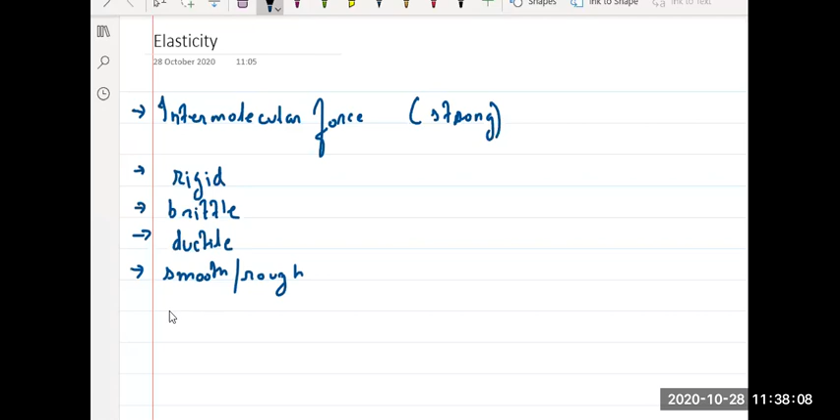Now melting point and all those things will come into intermolecular forces only, right? So we won't be going into the chemistry or thermodynamics part. We just talk about the physical nature. So mostly we'll be talking about these things.

There's one more property. Tell me, I'm waiting. What was the name of the topic? Tell me, what is the name of the topic? Yes, elasticity. So I can say elasticity, right? Okay, or plasticity.

Now, we will start with the basic introduction of this chapter. What is the meaning of elastic substance? Think about it. If I have to ask - because we all know the term elastic since our childhood - but when I ask you, what is the actual meaning of elastic substance? Tell me from your observation, just tell me what is the meaning of elastic substance.

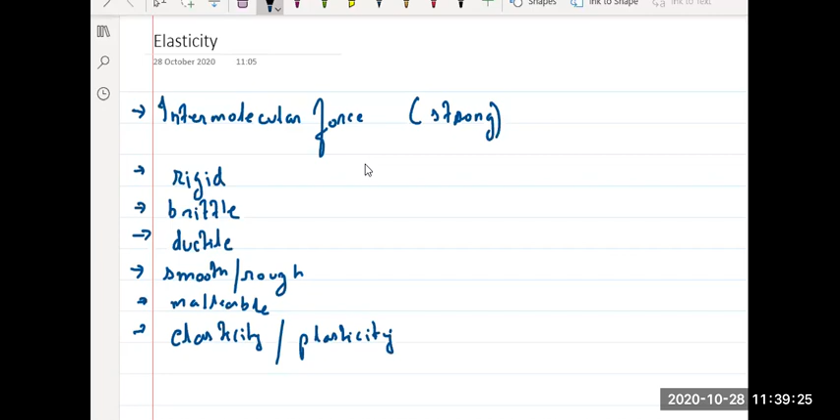Yes, very good. So I can say that the basic meaning of elastic substance is: any substance which regains its shape. For example, when you talk about rubber - rubber will regain its shape when you stretch it, then after some time it will regain its shape. So I can say that rubbers are elastic, right?

Yes, very good. Spring - very good, right? So springs are also elastic. Anything else? Sponge, okay, very good, right. So rubber band is rubber only, right? So these are elastic. What about your chalk?

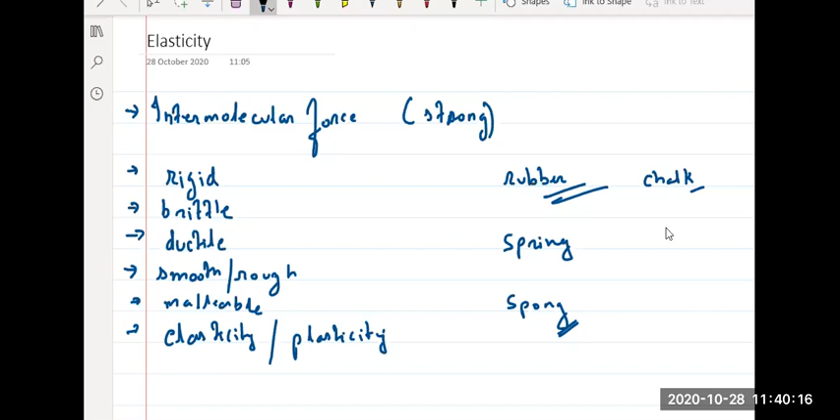What about your pen? Okay, what about steel? Steel - elastic or non-elastic? Okay, steel, not steam, Samarth, it's steel, right? Iron, steel.

Now, the thing is, for now we have this perception that a substance which can completely regain its shape is an elastic substance, but that's not true. I can say that the extent of elastic nature may vary from one substance to another. It might happen that some substance which we think is non-elastic may have some elastic property up to some extent. So we will be discussing what is the reason for this elastic behavior, what are the factors, and how to calculate it.

Now, for this - steel is elastic, steel is highly elastic, okay. We'll just discuss how.

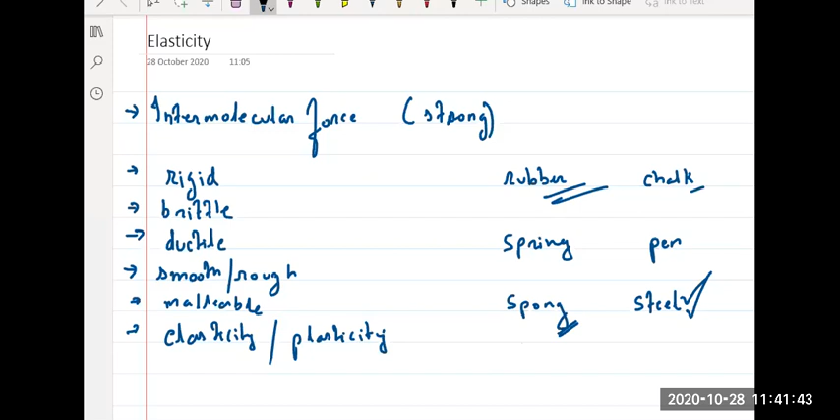Now let's see what is the meaning of these things. First of all, when we talk about a substance, we talk about its strength - strength of the substance, how strong any substance is, right everyone? So when we talk about the strength of a substance, strength of a material, what are the factors that we consider? Think about it. For example, you say this material is strong, this material is weak - what are the factors we consider for that? Okay, yes, hardness, okay. Anything else?

Okay, hardness, softness, rigidity. So have you heard of the word stress and strain? Ductility, okay, yes, very good, Srihari. So you can also say that, how much force it can experience before breaking, right?

Or how much force it can sustain before deforming or before fracture, right everyone? Now what's the meaning of these terms? What is the meaning of stress? Because when we talk about strength, we talk about a term called stress. Now before talking about stress, just think about a more basic thing.

What happens when we try to deform anything? Think about it. Suppose when you try to stretch a rubber, or when you try to push a sponge, what basically happens? Think about it.

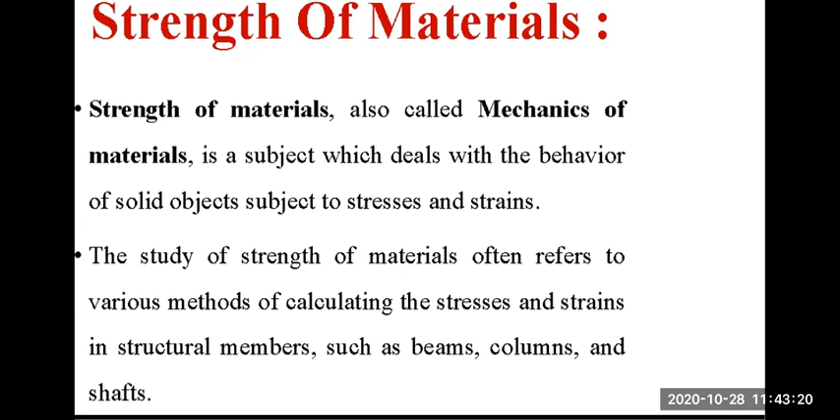We apply force, okay, very good. So when we talk about this, let's talk about a rubber which is like of this length, suppose, okay, just like this.

Now suppose you apply a force, it is a rubber. You apply a force in this direction. It is your applied force, or it is your driving force. Now tell me what will happen here. Think about it.

Just from your observation, what will happen if you try to pull a rubber? If you try to apply a force, what will happen? Obviously you're pulling from both sides. Yes, so the rubber will try to expand, it will try to stretch. So from this, it will try to stretch like this. Agree?

Got it? Now, if you apply more force, then what will happen? Think about it. It will stretch more first, right? Breaking is again the extreme point. You try to stretch more, yes or no? It will stretch more. I can say that if you apply more force, it will stretch more, as simple as that.

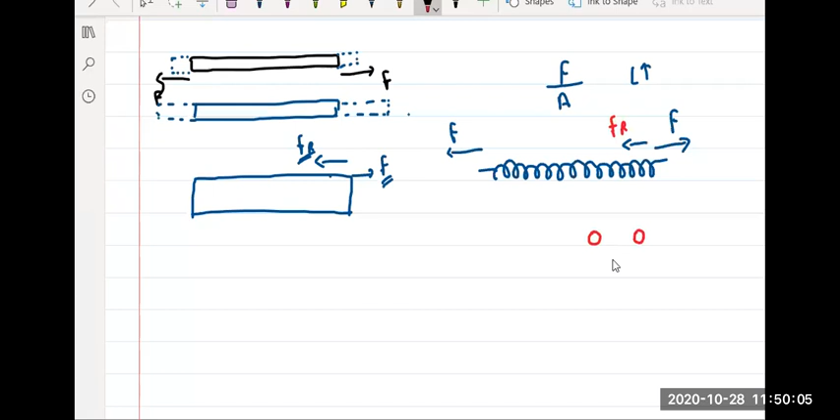Now if we talk about the intermolecular level, what happens? Think about it. We know that when you talk about two atoms, they are normally stable under some fixed distance, which is your internuclear distance, right, if you talk about on the interatomic level.

Now we know that this is the stable distance for any two atoms. If we try to pull it away, it will try to again come closer for the stability because of the force of attraction, intermolecular force of attraction. So I can say that that might be one of the reasons for this restoring force. I hope all have understood this.

So if we talk about this force per unit area, if this force is the force applied by us, which is your driving force, then this term will become pressure. Because that's the basic definition of pressure.

Now what about this term? When we talk about restoring force per unit area, then what is this called? This term is called stress. Got it everyone? Anyone have any idea?

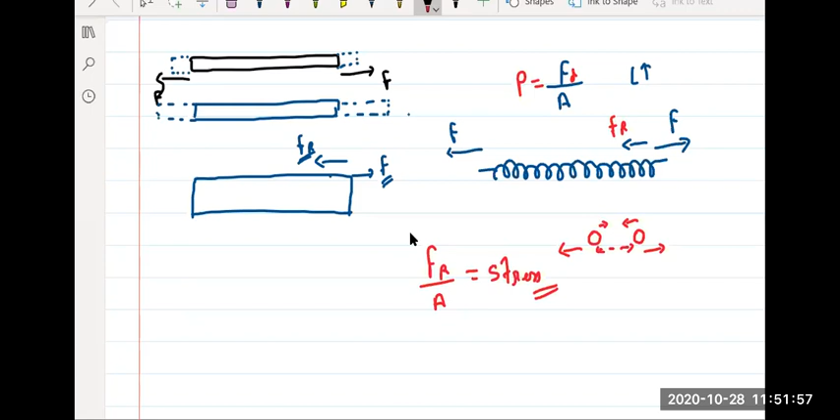So yes, technically it is a kind of pressure, but it is not the force which we apply. It is the force which is applied by the object, which is the restoring force. Now think about it, can restoring force ever be more than this F, more than driving force? Think about it. No, very good, it can never be more than driving force. It will always be less than driving force.

Okay, so I hope all of you understood what is stress. Yes Samarth, right, stress is kind of tension only. It's just the name that we give. Because when we talk about tension, tension is just a force.

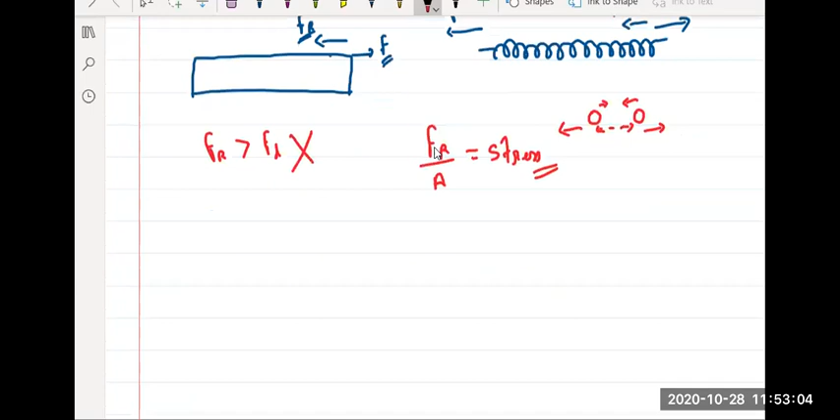So if I talk about a wire, this restoring force is your tension. But this force per unit area will become your stress. Got it Samarth? Okay, now I hope all of you understood what is stress. Now let's think about the same example that I was talking about. Now let's take one again, a wire.

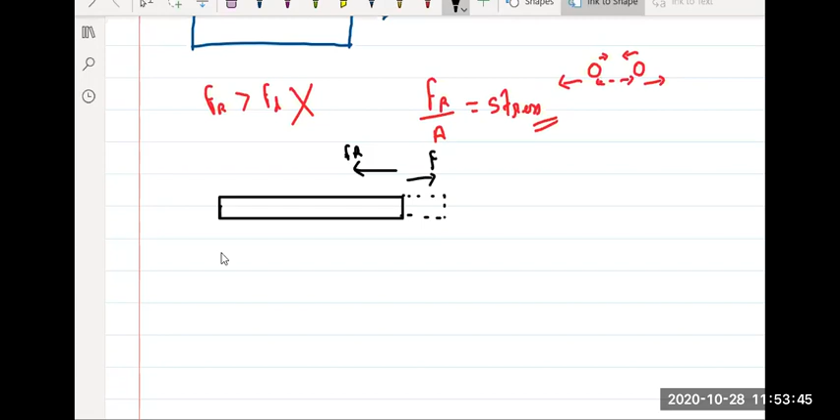Okay, now I know that if I want to apply a force in this direction, which is your F, this wire will have a force in the opposite direction, which is your F restoring, which will try to make this wire gain its shape if you try to stretch it. Now suppose the length of this wire is L, and this changes by delta L.

This change is delta L. Now think about it. Can I say that if force is more, restoring force will be more, yes or no? Think about it. If we apply more force, then the restoring force should also be more, yes or no?

Because this restoring force is like friction, right? The more we apply, the more restoring force will be there. So can I say that if I am applying more force, this length will be more? Yes or no?

But think about it. Can I say that if change in length is more, stress would be more? If delta L is more, stress will be more. Can I say that? Think about it, yes or no?

There's a very small conceptual doubt over here that you have to think about. I'm saying, can I say if delta L is more, then stress is more? Try to understand my problem. Can I say this? Most of you are saying yes, okay.

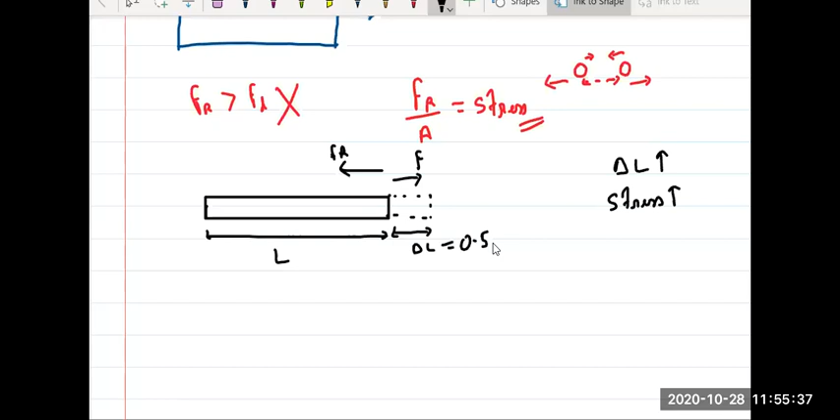Now let's take another example. Suppose I'm taking one wire, and here delta L is 0.5 centimeter, and the length is 10 centimeter. Now, second case: the length of wire is 20 centimeter, and this change delta L is 0.7 centimeter.

Now tell me, this delta L is more than that delta L, right? Can I say that stress is more in this one? No, right? It is clearly visible that because the length is more, even though it is changing, the stress cannot be the same.

So what I want to know is the change per unit length, yes or no? I should be considering change per unit length. Agree? So there should be a term something like this. This term is called strain.

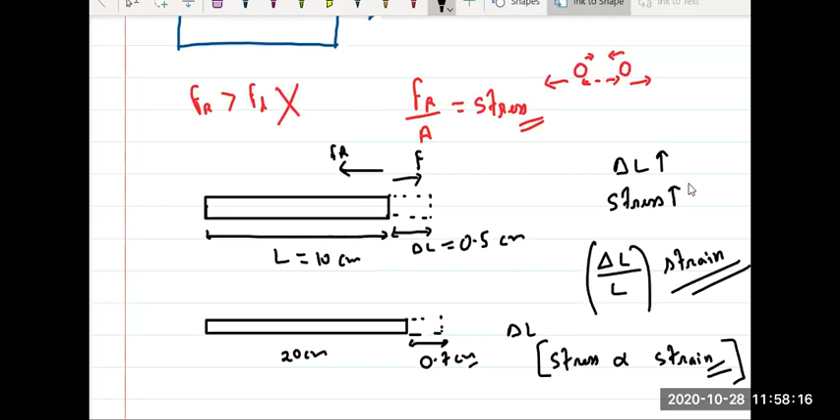Okay, so these are just introduction of the terms stress and strain. Now let's think about the type of deformation we can have. Let's take one example.

So let's take this, and let's take one more length like this, and one substance like this. We have three substances. Now we will try to talk about what can be the change in length, or what can be the type of deformation we can have. Now let's think about it.

Suppose we have this length. Now suppose we either pull it or push it. Depending on what we are doing, either pulling or pushing, it will either stretch or, if we push it, it will compress. Yes or no? Think about it, if this is your driving force.

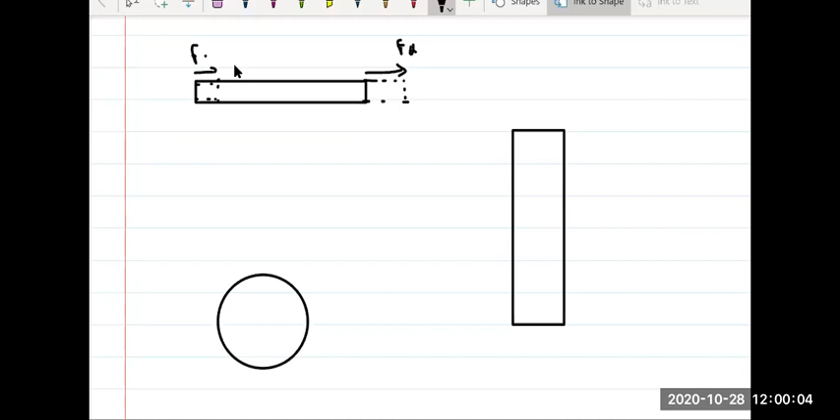If the driving force is in outward direction, then it will stretch. I should not use the term expand because that's wrong, I should use the term stretch. So this is your change in length, which is an increase in length, right?

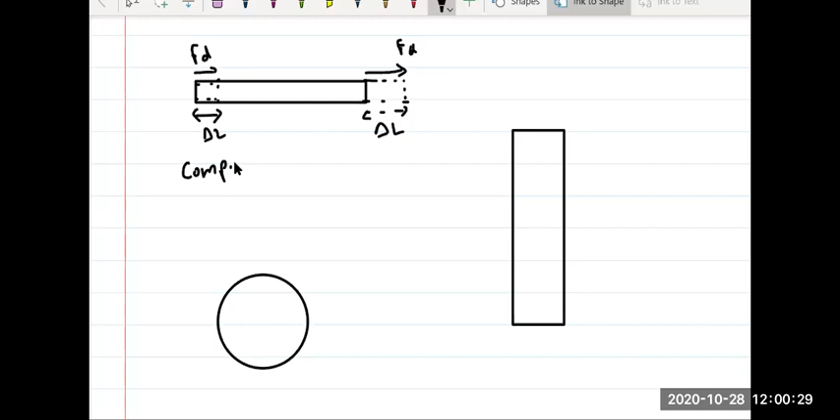But if you apply a force in inward direction, it will decrease in length. So that is your compression, and this is your stretching. Agree?

So these are the two cases when you're applying a force, in this direction. Does anyone have any issue with this?

See, expand means volume is changing, volume is increasing, but in this case volume won't increase, right? The area is also decreasing, right? So this area will decrease and this length will increase. So technically it's not the correct term, but you can still use it. Technically it won't be correct.

You can use it, doesn't matter, it's fine. Now let's think about this second case I'm talking about. I'm just talking about the deformation here, I'm not using any term.

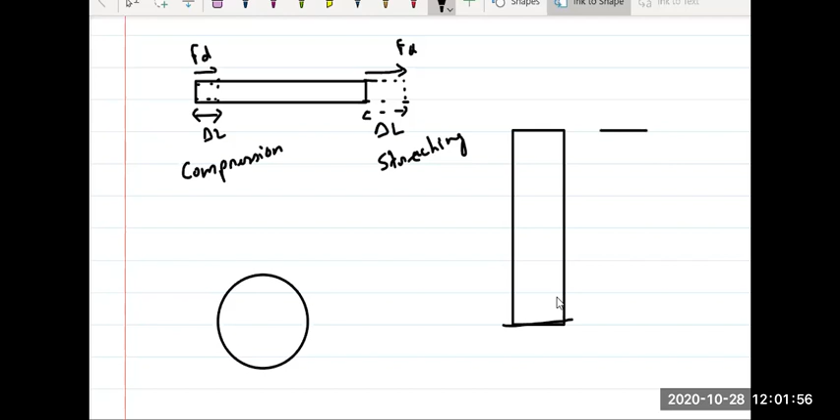Now think about it, suppose it is fixed. I hope all of you have seen this like a punching bag or something like that, where you push or punch it and it gets deformed like this, right? Then again it comes back. How many of you played with this kind of toy where you punch it and it just rebounds?

Anyone? I hope all of you have at least seen that.

Now let's take one scenario in which, instead of pulling or pushing, you're applying a force in the perpendicular direction, in this direction. This is the direction of the driving force. Now what do you think is happening over here?

What is happening over here? I'm not using any term because everything is the same. Now can I say that there's also kind of strain or stress in that? There's also deformation, yes or no?

Can I assume this as lots of different planes sliding over each other? Tell me, can I say this? One plane over here, one plane over here, and they are sliding over each other. Got it? Agree, everyone?

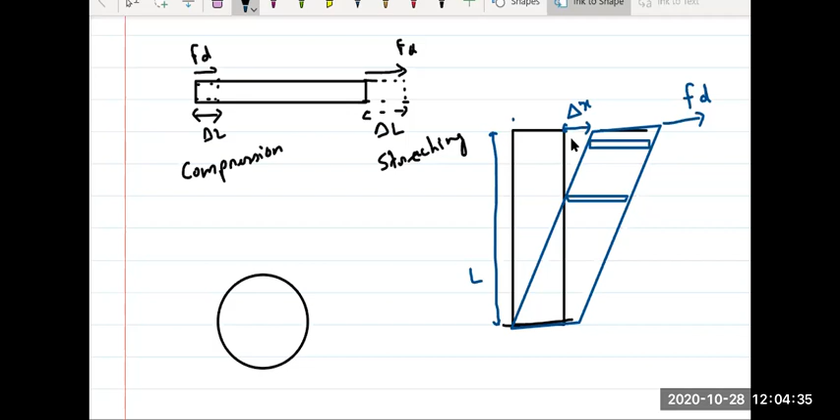Instead of delta L, I'll just use delta x, or delta anything, because delta L means this distance, but this is changing. I'm talking about the stress. If you apply more force, it will change this position now. It will slide more. When you talk about sliding more, the position which will change will not be the length, but this position, in the x direction, yes or no?

Think about it, agree? There won't be a change in length, but there will be a change in this position.

So I can say that here the strain should be the change in this length, which is delta x, by total length, yes or no? Because when you talk about this position, this is basically this position. Delta x is not this one, delta x is this whole position, because this point changes to this point. So this is your delta x.

Now when you talk about this point, so this is your delta x, right? Everyone got it?

Now can you see one thing? If you talk about delta x by L, delta x by L, you can see that this is your right angle triangle. You can see this right angle triangle, and this rod has tilted to this angle theta. This is angle theta, tilted to this angle, right?

Yes. And what is this delta x by L? What is this delta x by L? Tell me.

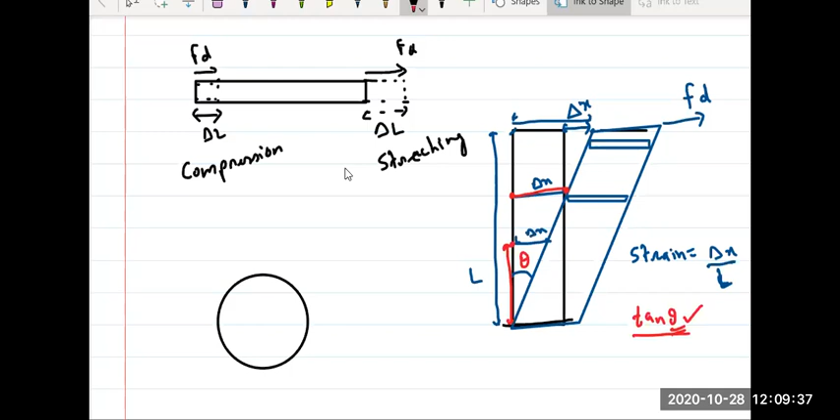Now let's take one more example. Let's take the example of a sponge. I hope all of you have seen a sponge, or that stress-releasing ball, that yellow happy ball. What do we do with them? Tell me what we do. We try to press it, yes or no? We press it from all directions, so basically we apply pressure only.

Now what happens? Think about it, if you press it, what happens? Tell me, everyone, what happens? It will almost reduce in size, yes or no? It is right, it will reduce in size, it will shrink. Yes, very good, right, it will shrink.

Okay, it will shrink. Now what will happen then? Tell me, what will happen then? If it is shrunk, yes, it's squeezed, right? Can I say that the volume is changing? Can I say that the volume will change? Yes or no? Tell me.

This is your initial volume, and this will be your final volume. So volume is changing, yes or no? Now think about it, think about your squeeze ball, that yellow one, and second, take your tennis ball. Now think about it, out of these two, which will shrink more, the squeeze ball or the tennis ball?

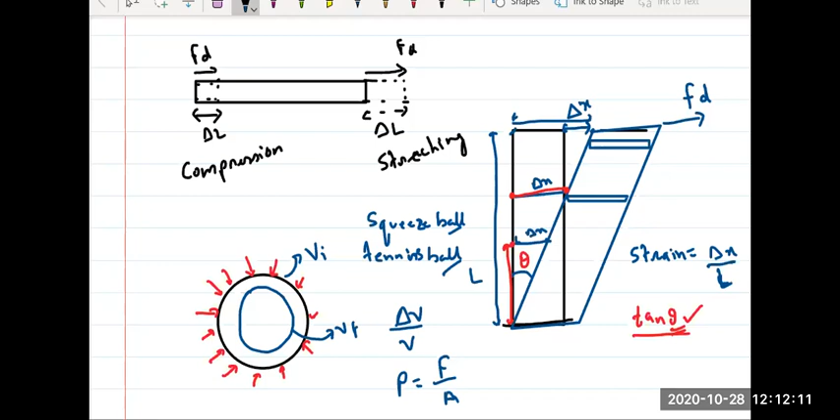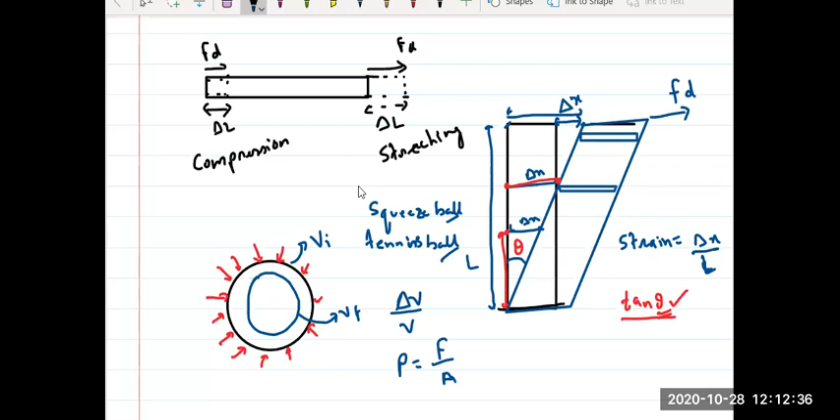So if we consider all this, what are the types of deformation that we have seen? In all these cases, what are the types of deformation? How many types of deformation have we seen? Think about it, guys. Three or four? Three. Think about it.

First is when you stretch or pull anything, or stretch. Second, compress. Third is the term called shear.

For example, think about it. Suppose this is a paper. Now this paper, I'm stretching this, I'm stretching this, right? If I'm stretching like this, what is happening? Tell me. Is anything happening? Yes or no? Try to stretch paper. So I can say this is very strong - if I'm stretching it, it is not deforming, so it is very strong.

Now I'll try to compress it. If I try to compress it like this, is anything happening? Tell me. No, right? So I can say that this paper is very strong when it comes to compression, when I talk about stretching or compression.

But suppose we apply force like this. Suppose we apply force like this. What happened? Think about it. I try to displace it. What happened? It teared, right? So that is called shearing force. That's your shear. The term that we use is shear. Got it?

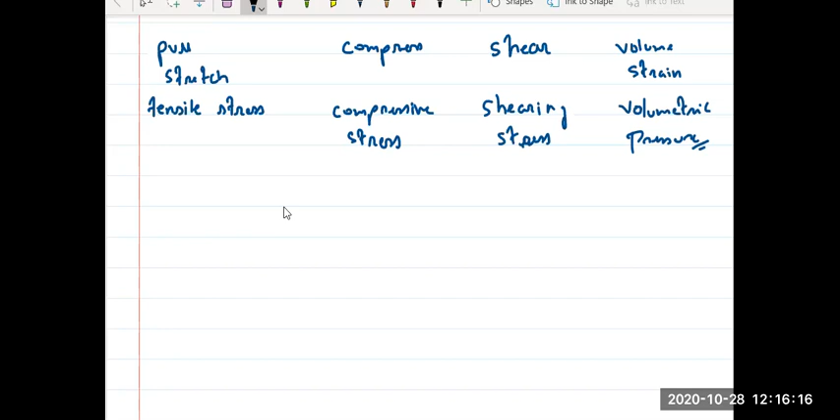Right, now this is about stress, this is the nomenclature of stress. Now when we talk about strain, wouldn't it be the same? Tell me, wouldn't it be the same? So this is your tensile strain, which is again delta L by L. Compressive strain, which is again delta L by L.

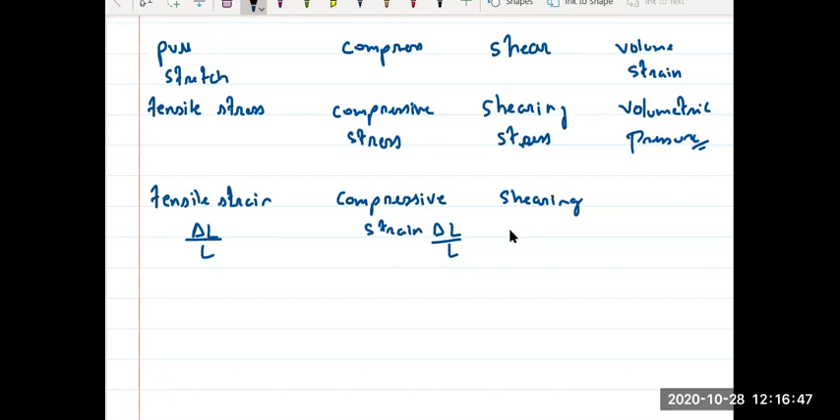Shearing strain, which is delta X by L. And then we have volume strain, which is delta V by V.

Got it everyone? Think about it. Got it? Because shearing stress, see, it is a name given, Karishma. Stress is same - stress is restoring force per unit area, that's it. So just think about it - suppose you take a spring like this.

Suppose you take a spring like this. You try to apply force like this, so it will try to regain its position. If you talk about spring - okay, I'm not having a spring, wait, I'll just check if I'm having a spring or not.

I'm not having a spring, I guess. So if you have a spring - wait, I'll just check if I have a spring. Okay, I don't have a spring, I have this clip. I'll just suppose this is a clip. Now the clip is like this, I'm applying a force in this direction. I'm not changing the length, I'm not pulling or pushing it. Yes or no? Think about it - am I pulling or pushing it?

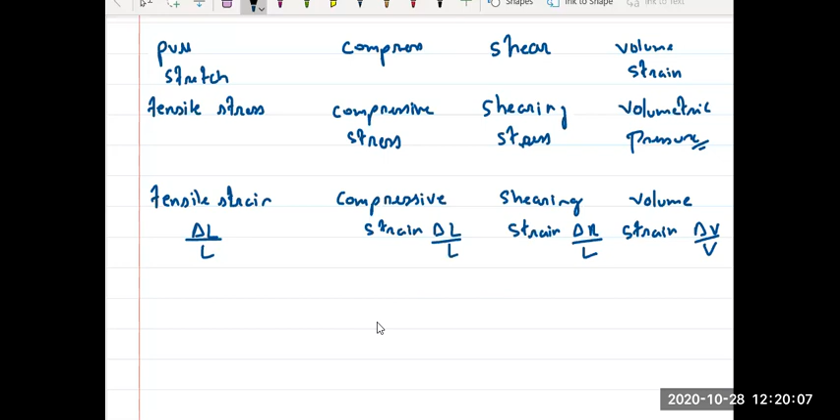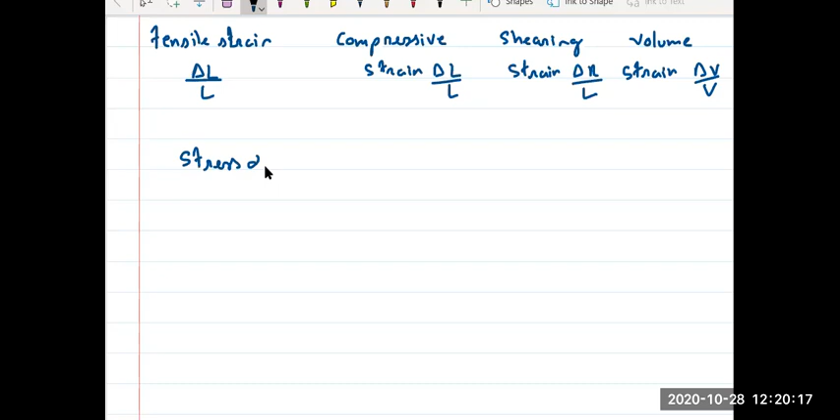Now let's talk about the relationship we studied. Let's think about it. Stress is directly proportional to strain. Agree? Anyone have any issues? Tell me, stress is directly proportional to strain.

Which means if we apply more force, more stress, the change in length per unit length will be more. Or if the change in length per unit length is more, the stress is more, right? That is your Hooke's law. This is given by a scientist called Hooke, so it is called Hooke's law.

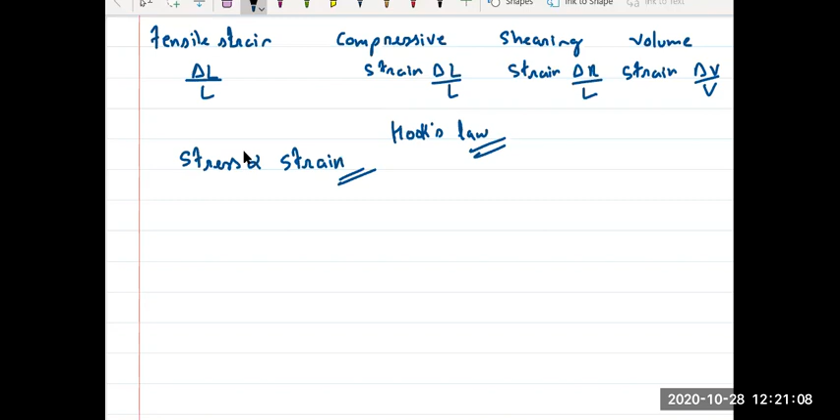Now, if stress is directly proportional to strain, I have to use a proportionality constant. Yes or no? Now this proportionality constant, I'm talking in general terms. I use a proportionality constant, suppose K. K equals stress over strain.

Now I ask you a simple problem: what is the physical significance of K? If I give you a value of K, can you tell me if this object is elastic or inelastic? If K is equal to, or very close to 0, think about it - then tell me, is the material elastic or inelastic? Or if K is very small, will it be elastic or inelastic?

Very good, Ovais. Very good, Anisha. Very good, right? So I can say that it will be inelastic. Right? Because even though there's change in length,

even though there's strain, there's no stress. Yes or no? If there's no stress, it means there's no restoring force. Think about it like this: if there's no stress, there's no restoring force, and if there's no restoring force, what force will make the object regain its shape? Got it? So I can say that if the K value is less, the elastic nature will be less.

Now, if K is almost equal to 1, and K should not be more than 1, makes sense? If K is almost equal to 1, then the object will be purely elastic. Makes sense? Got it? Anyone have any issue till this point? Think about it. Yes or no, guys? Clear? Okay, very good.

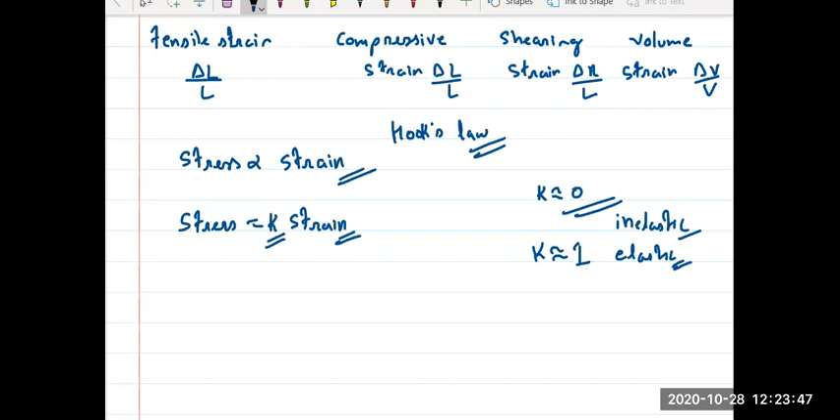Now, when you talk about the terms, the first thing is elasticity. What's the meaning of elasticity? I hope all of you know the meaning of elasticity now. So basically, elasticity is the property of any substance.

It is the property of any substance by virtue of which it regains its original shape. This is what we studied.

Now, when you talk about the factors which lead to this, first is your deforming force. Deforming force is the driving force which we apply, the external force which tries to change the length, volume, or shape of the body.

Now, what is the meaning of perfectly elastic body? When we talk about perfectly elastic body, it means it will completely regain its shape.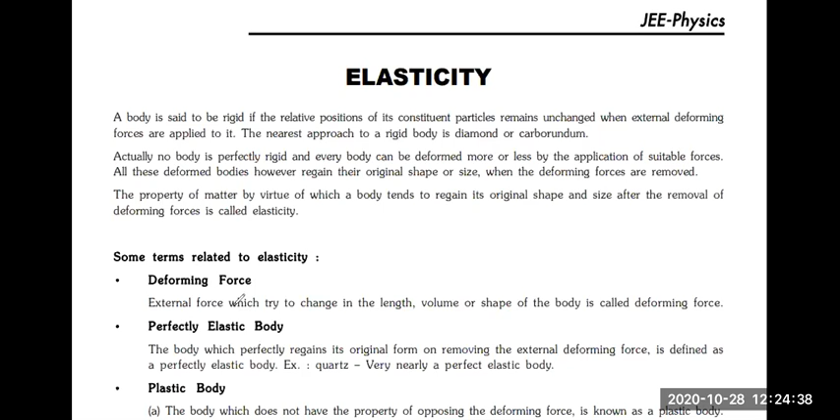Now, whatever we see, even rubber and anything, very few substances are perfectly elastic, quartz being one. Quartz is a kind of crystal, we won't discuss more, but quartz is almost perfectly elastic. When you talk about rubber or steel, it's not perfectly elastic, because when an object is perfectly elastic, it means it should obey Hooke's law.

It should obey your Hooke's law.

Now, one more thing I want to ask: the Hooke's law, which is stress is proportional to strain, will it hold true for all the cases? Think about it. No, that should hold only under elastic limit. So that relationship will hold only under elastic limit. We will discuss the curve, don't worry.

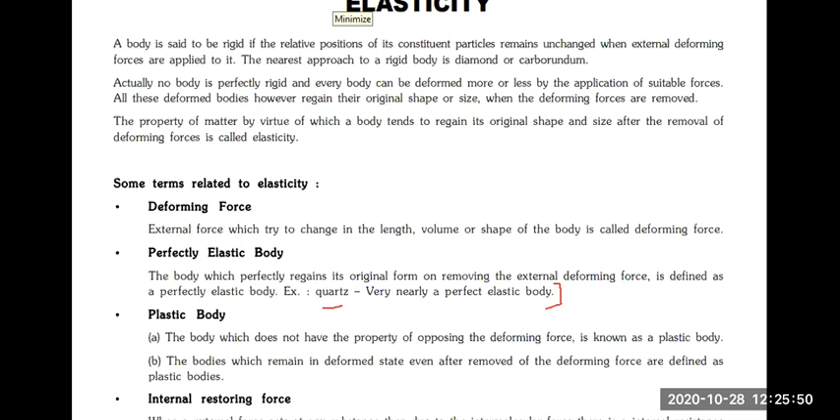Then what is plastic body? Obviously, which we will not regain, that is your plastic body. Then we talked about internal restoring force. I hope all of you understood.

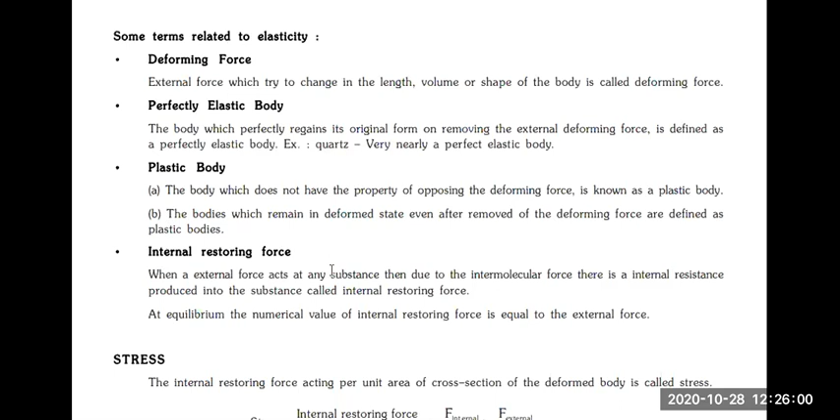Now stress, what is stress? Stress is the internal restoring force, or restoring force per unit area. We know that the restoring force depends on the external force. If we try to increase the external force, the internal force would be increasing. So F internal by A should be equal to F external by A. But according to the definition, it is restoring force.

Now, this term is same as pressure, so the unit will be same as pressure. But what about the unit of strain? No unit, because it's length by length.

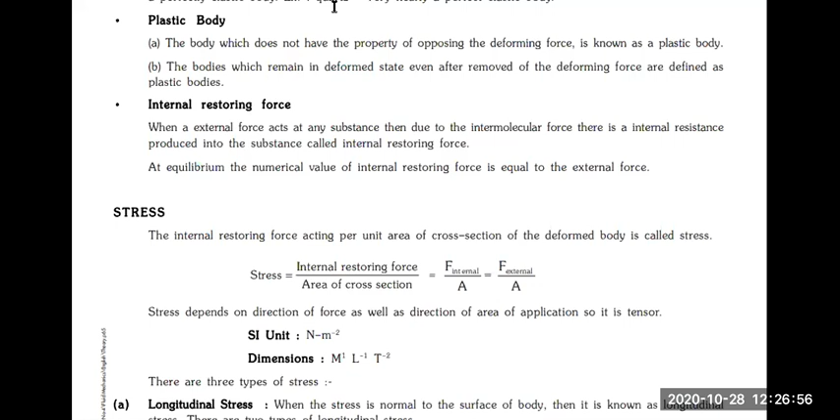Now, if the stress is along the surface of the body, or if the stress is normal to the surface of the body, think about it. If I'm talking about this surface and stress is like this, then it is a longitudinal stress, along the length.

And longitudinal stress is of two types, which we have discussed. What are the two types? We talked about the stress along the length, but it is of two types.

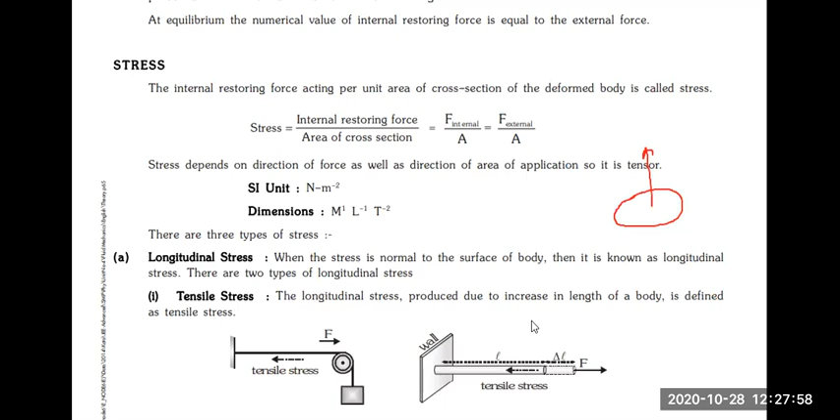One is already shown here. If it is stretching, then it is your tensile stress. So if there's increase in length of the body, if there's a pulling force, if the length is changing and increasing, then that is your tensile stress.

But if it is compressing, if you're pushing it, then it is your compressive stress.

But if the force is parallel to the area, think about it, then it is called shearing stress or tangential stress.

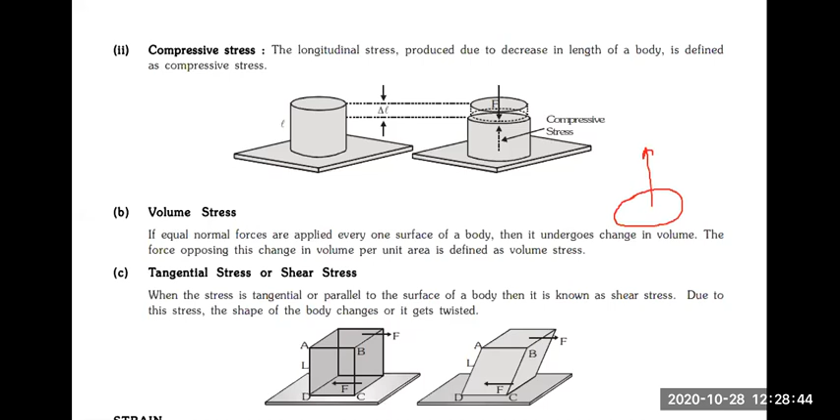Okay, so we have already discussed this. Now strain: strain is change in length per unit length, or change in size of the body by original size of the body. That's the basic definition.

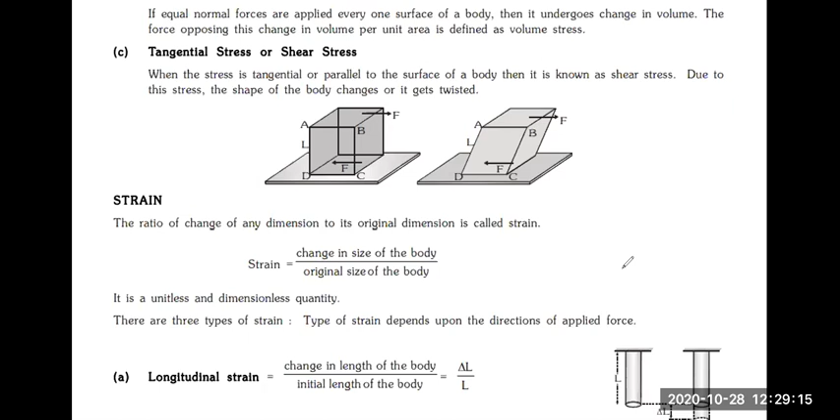Because when you talk about the change, it can either be change in length, or change in shape, or change in volume. So depending on the type of stress or type of deformation, we have longitudinal strain, which is again divided into two types: tensile as well as compressive.

Volume strain is change in volume per unit volume. Shear strain is change in length, which is basically the displacement of any point. If you talk about this displacement, it is this distance. So displacement of a point divided by the initial distance between the faces gives you tan phi, where phi is the shearing angle.

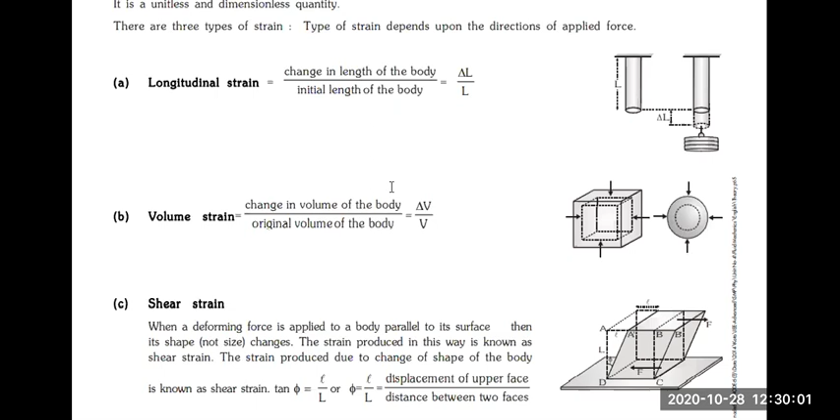Now there's one more type of strain that we will not discuss now, but I hope you understood this relationship. If it is torsional, if you are twisting it, it is also kind of shear stress or shear strain only. Suppose we are twisting something, it is also one kind of shear stress or shear strain, but it is called torsional strain. This is called torsional strain when anything is twisting.

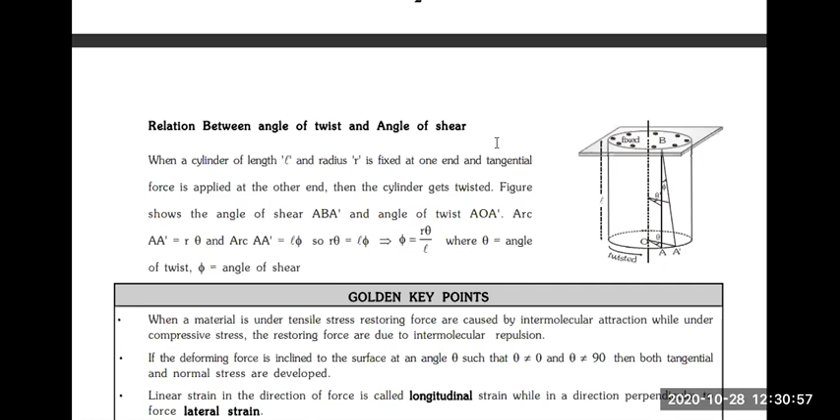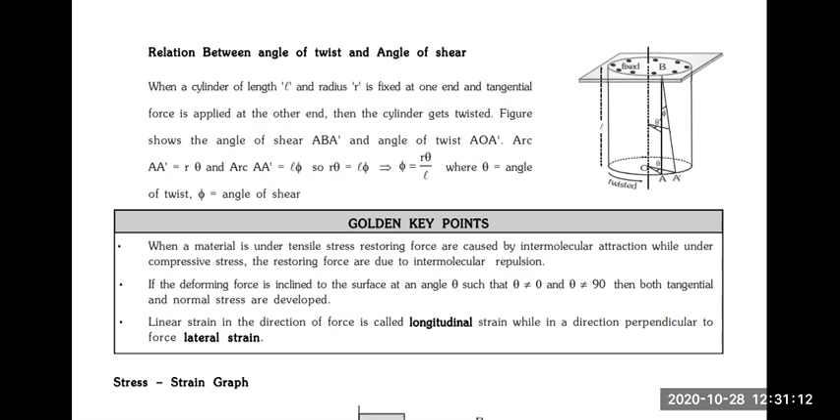Now let's talk about the graph. We know that according to Hooke's law, stress is directly proportional to strain, or stress is equal to K into strain. So suppose stress is Y, K is a constant, and strain is X. So this equation represents what? Tell me, straight line, yes or no?

So I can say that if any object is following Hooke's law, the graph between stress and strain should be a straight line, like this. But this Hooke's law is followed only under elastic limit.

When you talk about spring or rubber, apply extreme force. What happens? It will try to expand, but after some point, it will be deformed permanently. Have you observed this? If you try to expand the spring after some time, it will not regain its shape, it will be deformed. So there will be some point at which it will hold this relationship, and the graph will almost be a straight line.

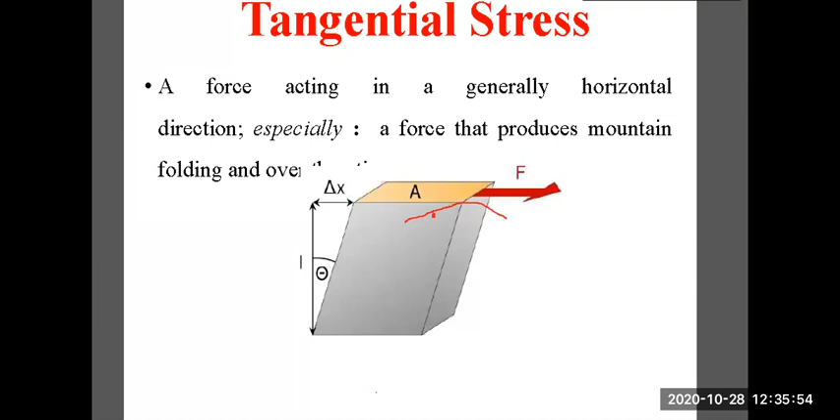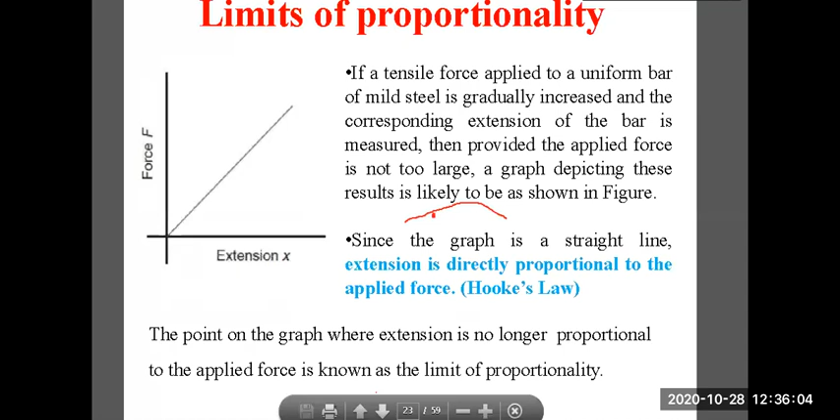So this is the most common graph that you will observe. This is the proportional limit, this is the elastic limit. After this, there will be a point at which it will just keep on deforming, and this is called the breakdown point, or failure, or point of fracture—there are many names. Point of fracture means at this point it will start to break.

For example, if you keep on pulling rubber, what will happen? It will break, right? Got it? Or if you keep on pulling a spring, it will break, it will try to fracture. That is the breakdown or failure point.

Now this whole region is the plastic region. Think about this: there might be some substance which has a very small plastic region, and there might be some substance which has a very high plastic region. Think about it.

What about gold? Does gold have a very high plastic region or a very low plastic region? High or low? Very high, right? Because if the plastic region is low, it will break as soon as more strain is applied. But we know that 1 gram of gold can be drawn up to 2-point-something kilometers of wire, meaning it can keep on stretching, keep on stretching.

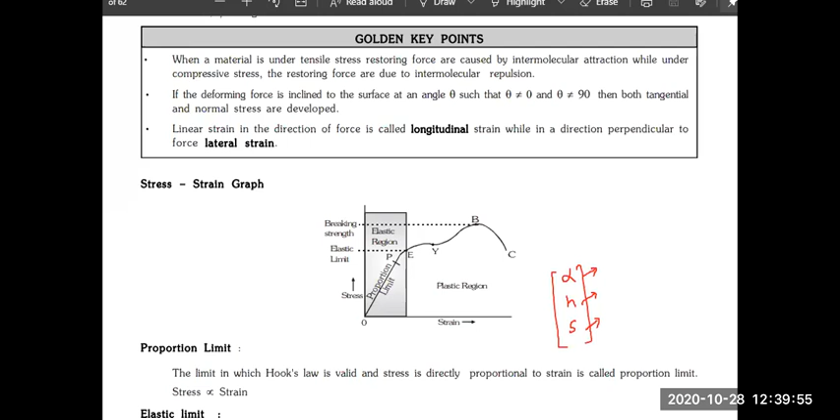When you think about chemistry, we know that alpha, H, S all have the same meaning but different names—degree of dissociation, degree of hydrolysis, solubility—but all of them almost have the same function, only the name is different. So in the same way here, the name will be different.

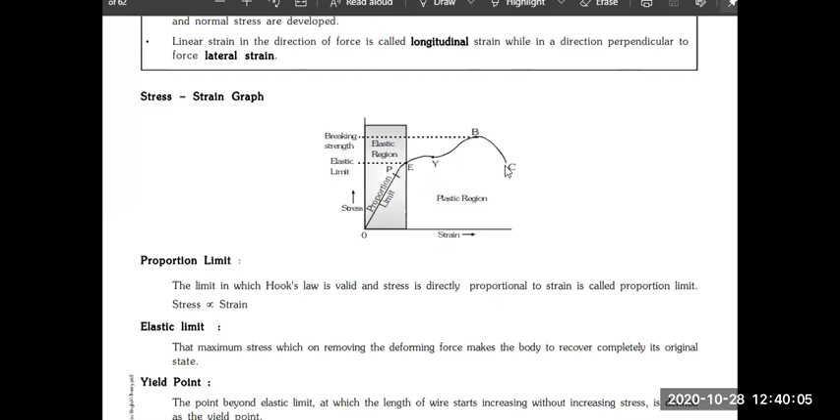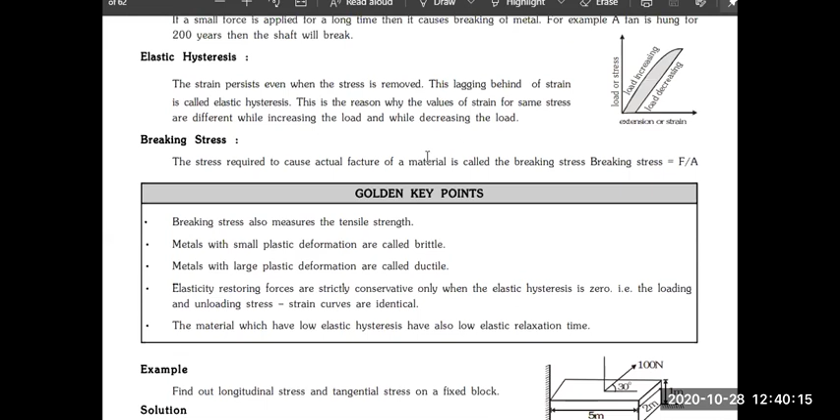Now let's see one example. So here we have this. Now in this case, when you talk about longitudinal stress, the force is applied here in the direction of 30 degrees—think about it, the force is applied at angle 30 degrees. So we know that for longitudinal stress, which force will we take: this component or this component? This is Fy and this is Fx. For longitudinal stress, which force will be responsible, Fy or Fx?

Longitudinal always perpendicular to the surface, right? It is perpendicular to the surface, nah, right? Video is stuck. Video is stuck, right? Okay, it's fine. Yeah. So

I hope all of you understood this. If we have been given a situation where force is making an angle alpha or beta, it can be drawn into components, X component and Y component. This X component, which is parallel to the surface, is responsible for shearing stress or shearing strain. But this other component is responsible for longitudinal stress, and that too in tensile stress. Got it?

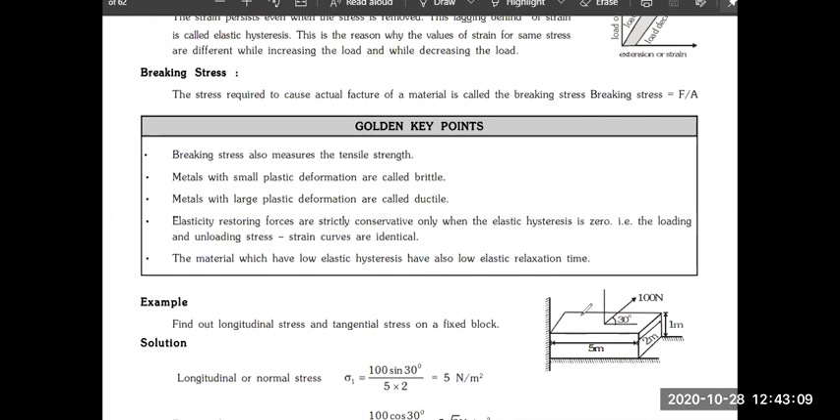Sigma is stress only, epsilon is your strain only, Y is your elastic constant only. Got it? So when you talk about longitudinal or normal stress, you can calculate this force by this whole area.

Now try to solve this example, everyone. Think about it, guys. Second one. Stress is force per unit area, that's it, as simple as that. Force per unit area, nothing more than that.

Tell me guys, try to solve and tell me. Think about it, everyone. So what is given? Breaking stress is given, right? Greatest length of aluminum wire that can hang vertically without breaking, density is given.

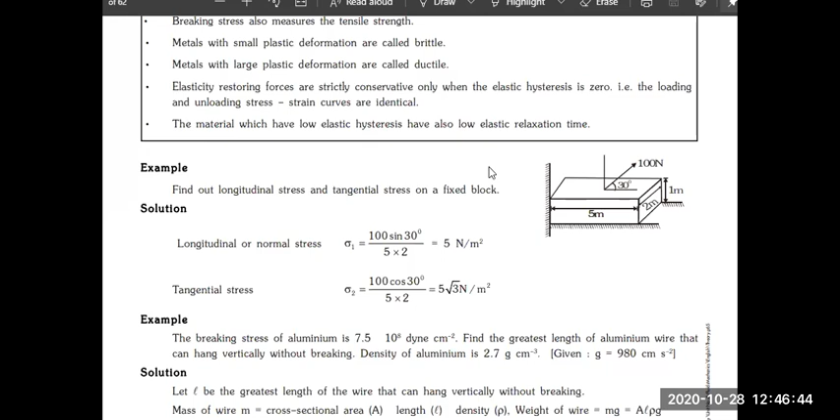Now this whole stress is given, density is given, G is known. Can you find L? Can't you find L? Was it a difficult problem? You can calculate L. Okay, very good everyone.

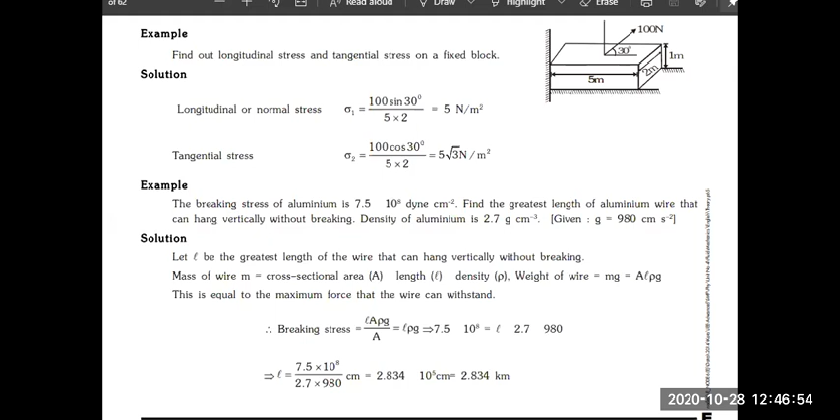So we already studied Hooke's law. Hooke's law says that stress is directly proportional to strain, or stress by strain is a constant. This constant is called coefficient of elasticity. It depends on type of stress and type of strain. If I'm talking about longitudinal stress by longitudinal strain, then it is Y, which is Young's modulus of elasticity. Got it? Now think about it.

Think about this example. B, C, D are three different types of substance attached together. Y is basically your Young's modulus, given as Young's modulus.

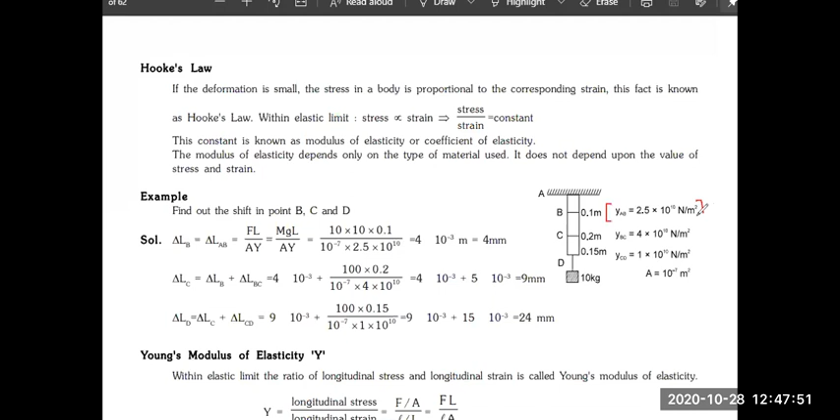Now let's look at this relationship. Y is stress by strain, longitudinal stress by longitudinal strain, and longitudinal stress is F by A, longitudinal strain is delta L by L, where delta L is the change in length. So F into L by delta L into A is your Young's modulus, yes or no?

So can I say that delta L is basically FL by A into Y? Tell me, yes or no?

If I'm talking about the net change in length of this whole wire, it is change in this plus change in this plus change in this - delta LB, delta LC, delta LD. Agree or not?

That's what we've been saying from the start. So if you see this, for this length, delta LB is just delta LB, which is just this.

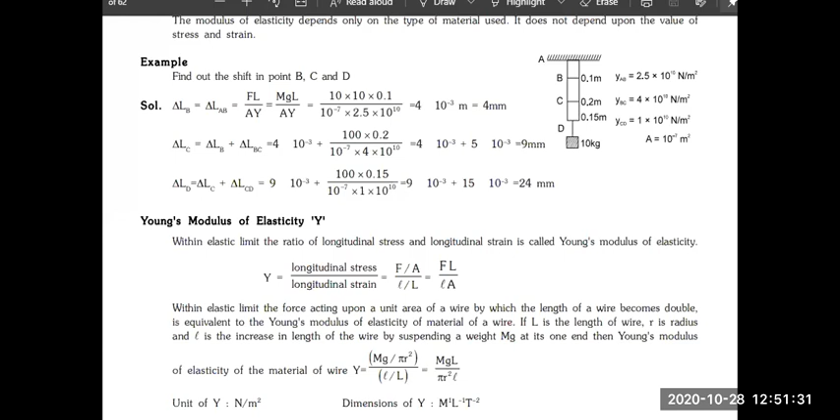Yes. Now think about it - can I say that if any substance is not moving, then it is rigid? Then it is rigid, yes or no?

Because if it is changing in length, then it is elastic. But if it's not moving at all, then it is rigid. So can we say this ratio of stress and strain is called modulus of rigidity? Yes or no?

So if this n is almost equal to 1, what is the meaning of this? Or if this n is a lower number, it means the object is fluid - the surfaces are sliding over each other. And if the value of n is more, it means it is rigid.

Think about it, yes or no? Here, shearing strain is just phi angle, which is called the shearing angle. Now think about it.

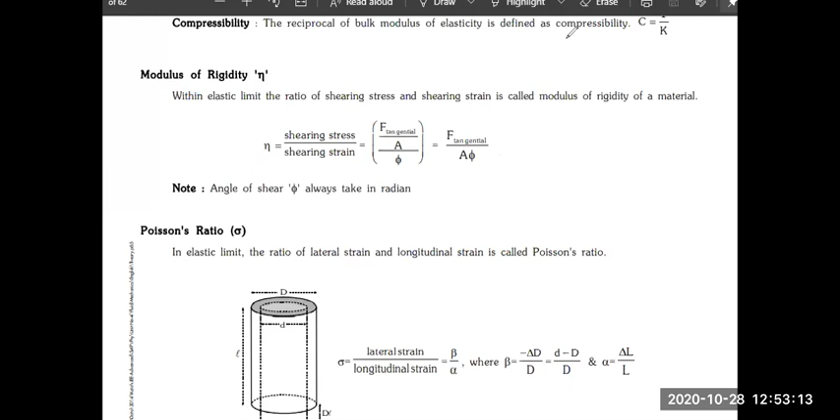What about volume? What about a volume change? When we talk about changing volume, it is called bulk modulus of elasticity, which is basically either called K or B. K we have already used.

Now think about it - when you talk about bulk modulus, it is volume stress by volume strain, yes or no? But we know that when pressure is applied, volume will decrease, so this delta V will always be negative, because if volume is decreasing, final volume will always be less than the initial volume.

Now, in order to make this positive, I have to multiply by negative, yes or no?

So if you talk about this, we will get this relationship: bulk modulus is equal to force per unit area by minus delta V by V, and force per unit area is basically P, then V by delta V, negative. Yes or no?

Tell me, anyone have any issues?

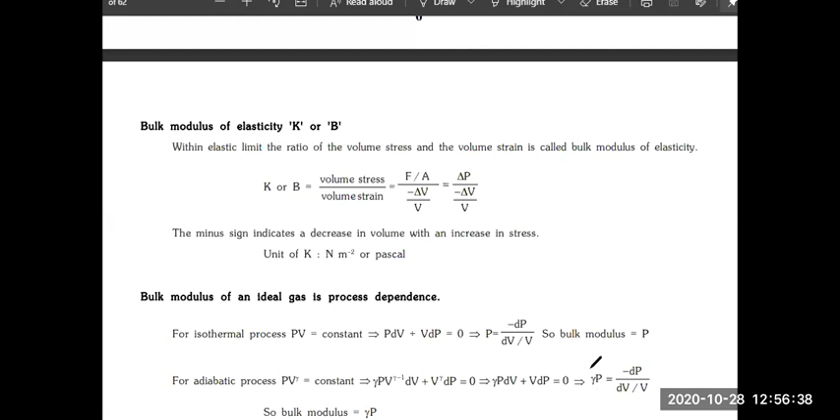But when we talk about adiabatic process, this is gamma P, which is equal to bulk modulus. So you just have to remember this.

For isothermal, B is equal to just P. We will be using this in thermodynamics, KTG will be using this. And for adiabatic process, B is equal to gamma P. Got it? These things you have to remember.

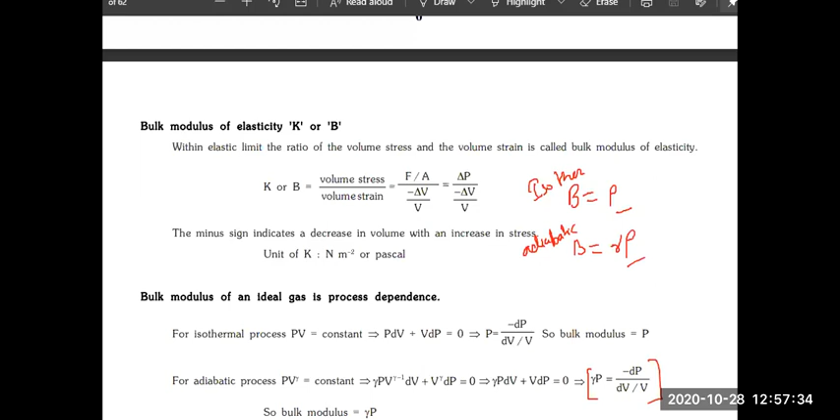Anyone have any issue in this? Tell me guys, anyone have any issue? All of you understood till this point? I hope all of you understood till this point.

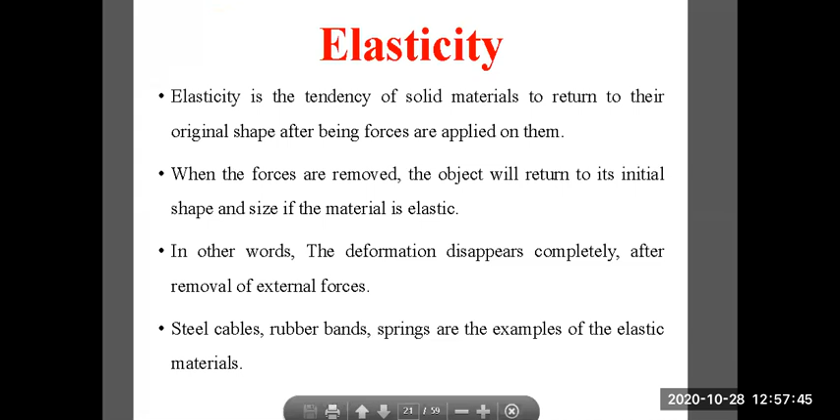So I'll just send you this. I hope all of you understood what is volume strain, shearing strain. Got it?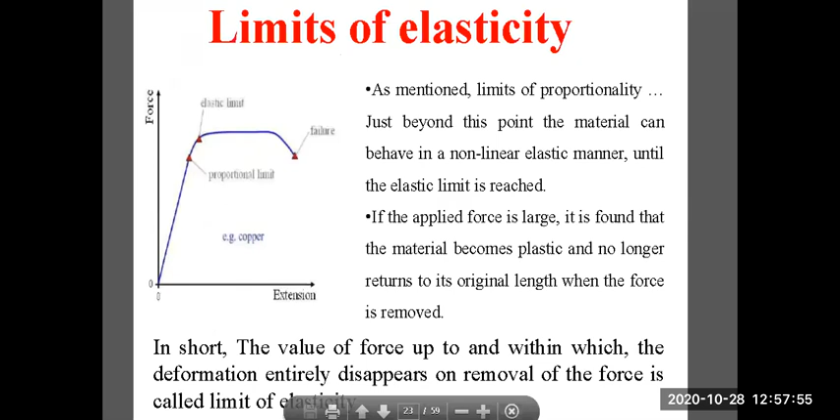We completed till this point. Yield limit, ultimate stress, these things we don't have to worry about, we don't have to study. Young's modulus we studied. When you talk about Hooke's law, it is stress is directly proportional to strain. Got it? And this constant will change depending on which stress and strain you're talking about.

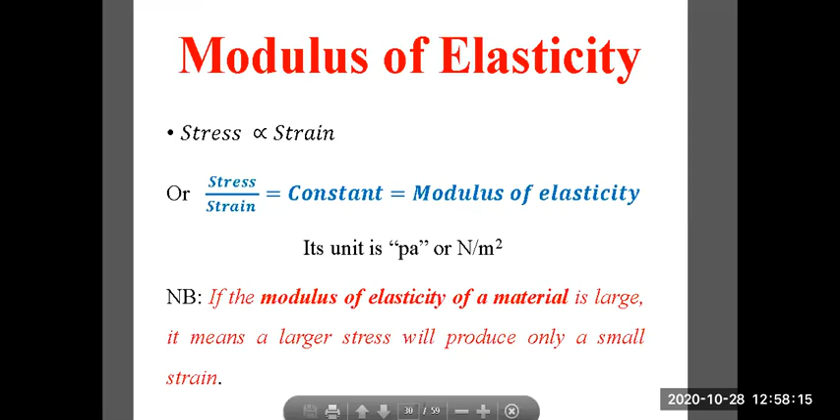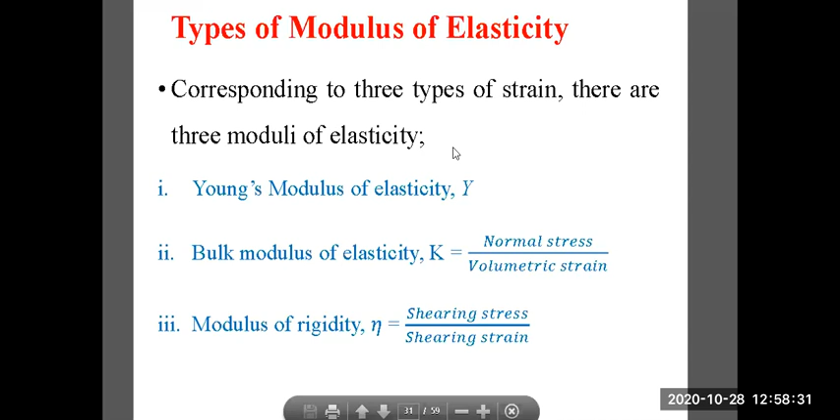Now, when we talk about Young's modulus, this is for longitudinal stress by longitudinal strain, bulk modulus which is basically normal stress by volumetric strain, then modulus of rigidity which is shearing stress by shearing strain. Got it? We have covered this. I hope all of you understood this. Tell me, right? Okay.

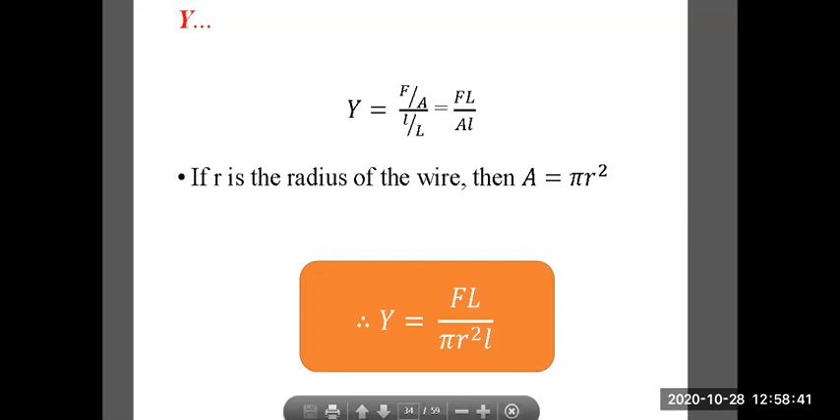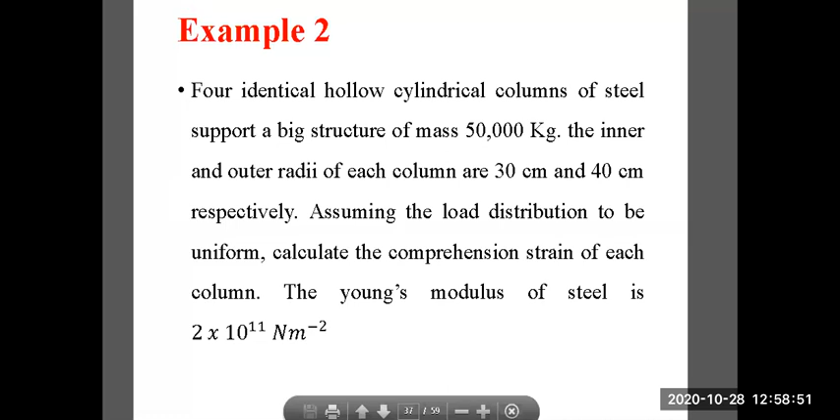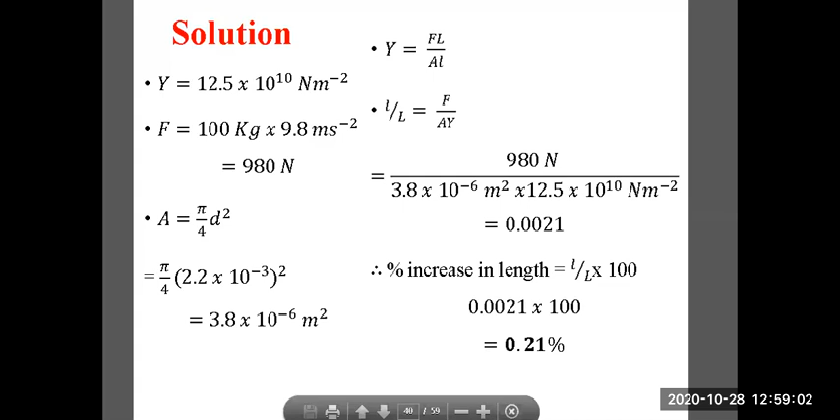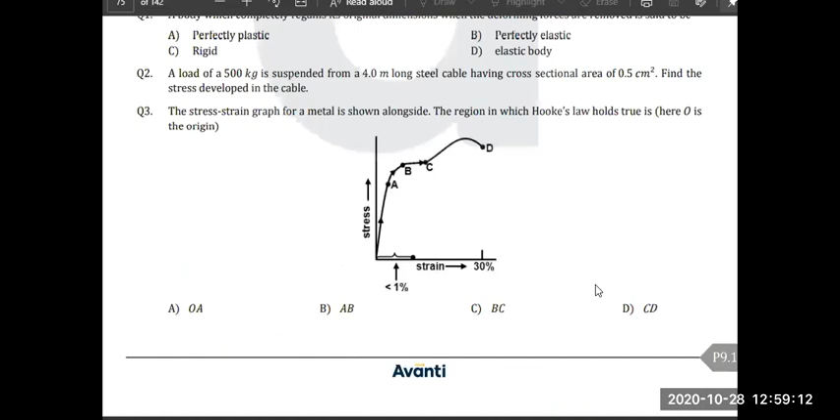Okay, in next class we'll be completing this. So I request all of you to go through the exercise, because in next class first we'll try to discuss the problem, then we will solve. So if you spend at least 1 hour, you can solve all the questions till question number 8. Now there will be some good questions.

For example, when you talk about question 5, you have to do integration. So if you don't get it, no issues, just try. NEET students, you can try the examples, or everyone, try the examples of H.C. Verma and D.C. Pandey.

Everyone try examples of H.C. Verma and D.C. Pandey first. Makes sense that you can do, right? Examples of HC Verma and DC Pandey. Okay, and try to complete rotation one. I'm not giving any homework in this because this chapter is quite easy, but since we have to complete it, I have to take 1 or 2 extra classes. So try to solve this as well as rotation one.